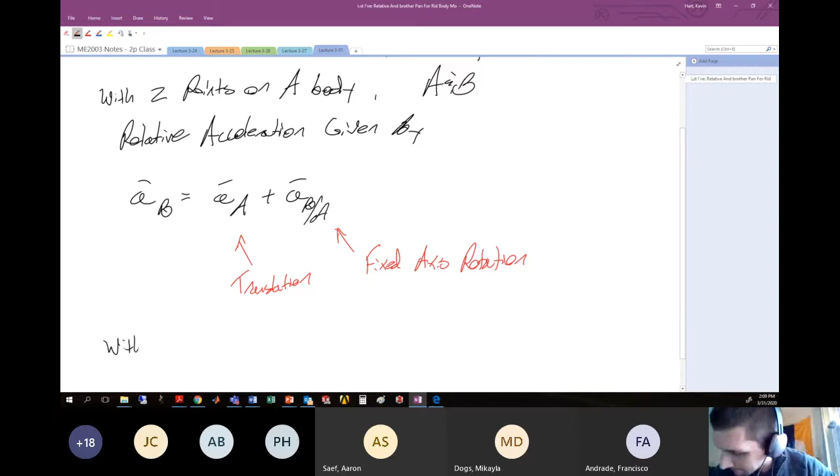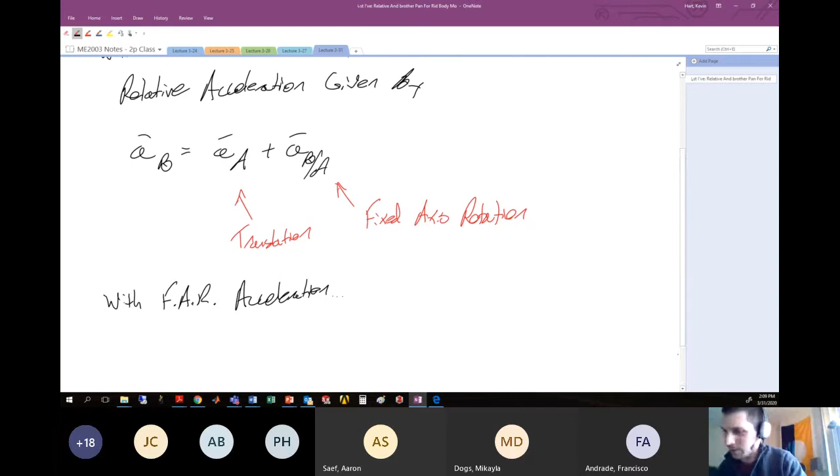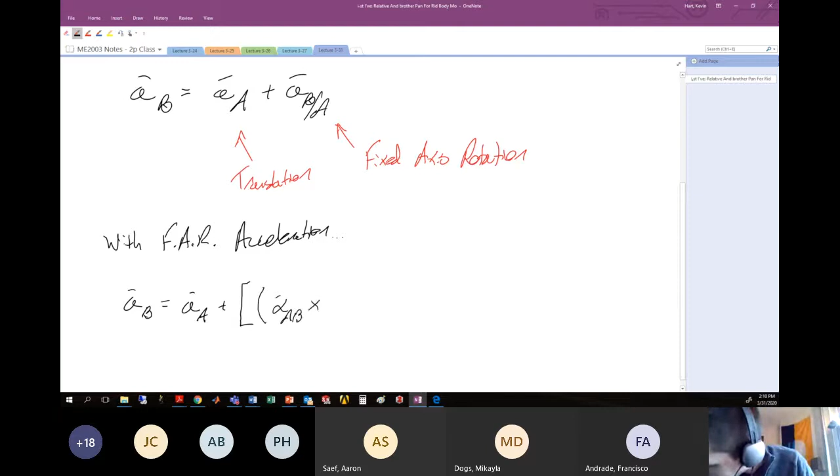And so with fixed axis rotation acceleration, we come upon the general relative acceleration equation that we use over and over in this class, and that is that the acceleration of B is the acceleration of A plus the fixed axis rotation, which generally we say is the angular acceleration of body AB crossed with the position vector locating B from A, plus the angular velocity of the body AB crossed with the angular velocity of the body AB crossed with the position vector locating B from A.

Okay, if you've worked on homework 2, this should be very familiar to you at this point, since you've had to use this equation quite a bit. So as I mentioned before, this was box-worthy and sparkle-worthy, this is one of the 2 equations that you use in this class over and over. Even after we get done with this portion of the class, when we start to move on to kinetics, which relates things like forces to acceleration, you'll still be using this equation over and over. So this guy gets sparkles, he's very fancy.

Yada, yada, yada, sparkly, sparkly. All right.

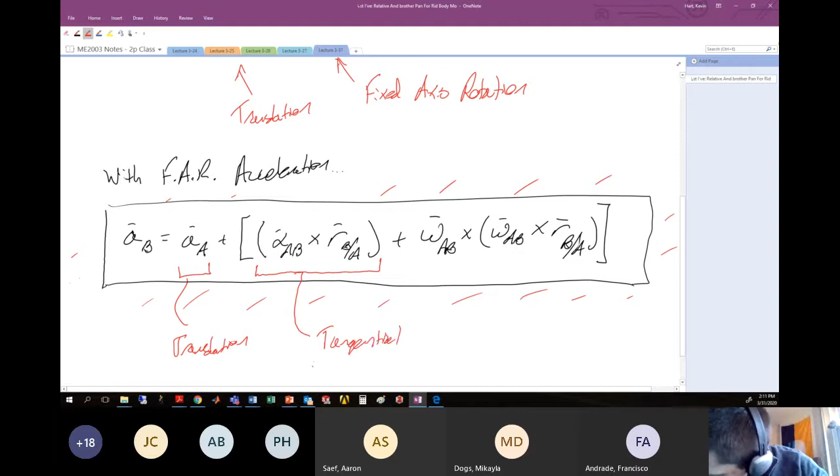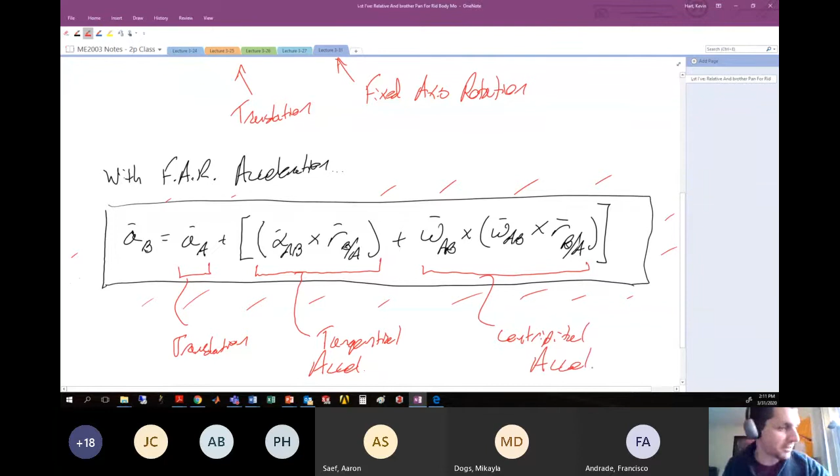Sparkles are good. Again, translation. And then this entire back end is the fixed axis rotation, but we can further split up the fixed axis rotation into what we say is a tangential acceleration component. And this we say is a centripetal acceleration or normal acceleration. So this is the acceleration component that points back inwards to the point of rotation.

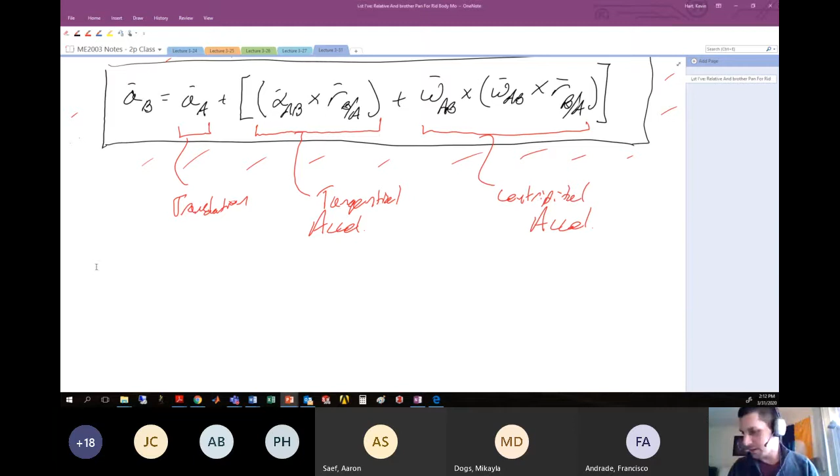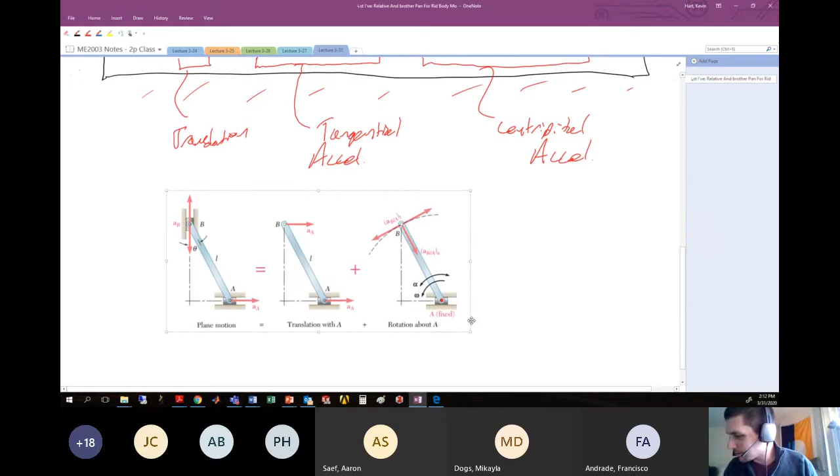All right, so we introduced this equation. I want to dive in a little more depth on this guy, and then we'll do an example problem. So I'm actually going to steal the image from your notes. If you have the PowerPoints in front of you, I'm going to steal a particular image and talk through what's going on in it. So instead of trying to draw it myself, which would probably be a disaster, I'm going to pull it up here, make it nice and large so people can see what's happening in this picture.

Okay, so this picture is a representation of physically what you might see from the mathematical equation that we derived. Here, if we think about this point A down here as being pinned to this bar on a slider, and let's say we know the acceleration of A, which I've highlighted down here. Maybe I'll use blue since there's some red already in this picture. So let's say that we know that information and we're interested in the acceleration of B.

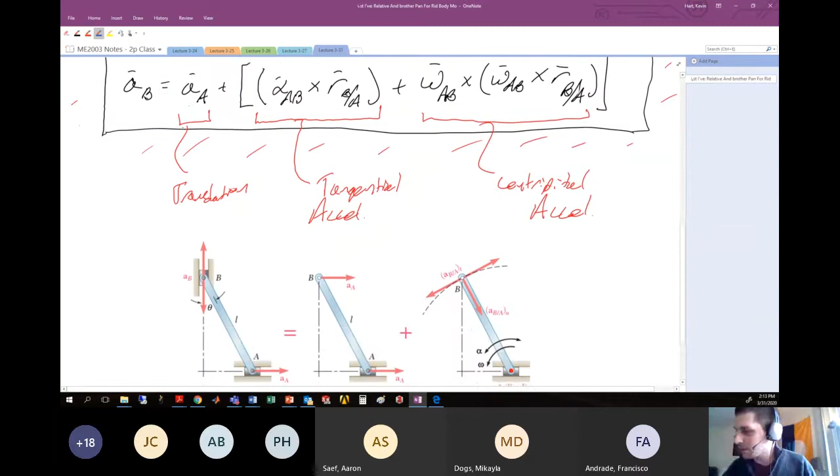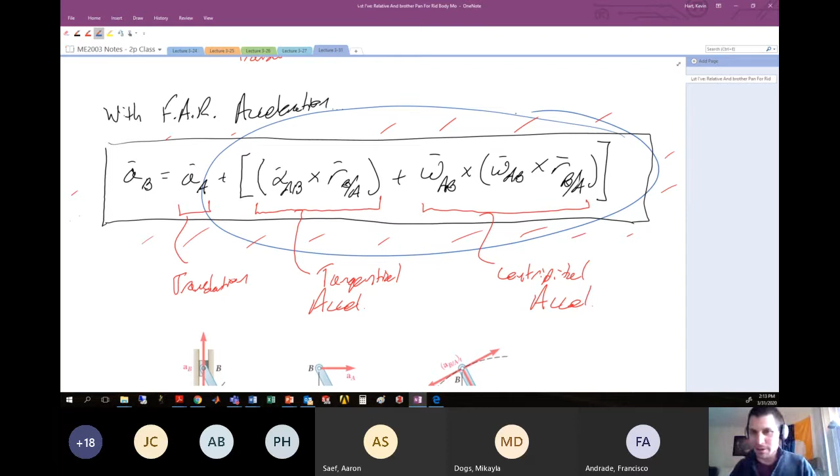Well, our equation would tell us that it is some combination of the translation of A plus the fixed axis rotation of B relative to A. The fixed axis rotation has 2 different components to it, the tangential and the centripetal portions, and I want to expand on that a little more. This image is trying to show that the total acceleration of B is the translational component. Here we see that the translational acceleration of B is the same as the translational acceleration of A, plus these additional components on this other piece.

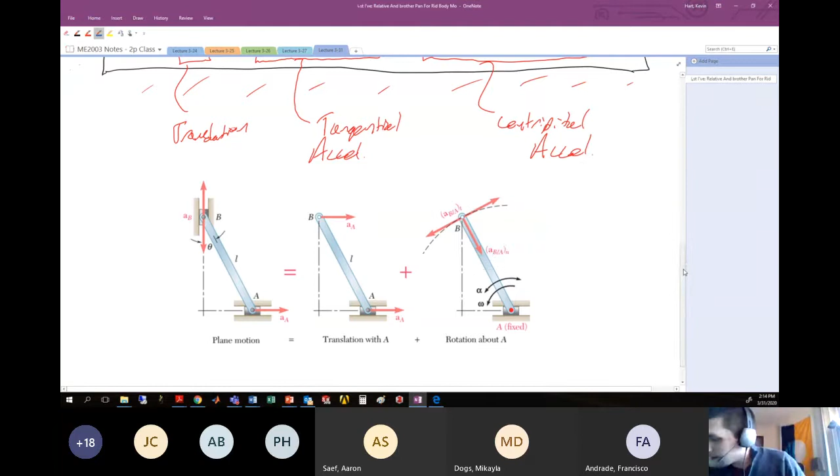Where these components are from fixed axis rotation. And we see the 2 different terms that pop in from the fixed axis rotation. So here, this is the tangential term. These 2 arrows are meant to denote it could be either one way or the other. In reality, only one of these directions would be present, but they're showing that it could be occurring in either direction. And then here is the centripetal portion, and this guy up here is the tangential portion.

All right, let's dive in a little bit more on this mathematically. Generally, this guy as a tangential portion is sometimes written, and you can see it here, but I'll make it a little bit more clear. This is the acceleration of B relative to A, and sometimes it's given this sort of T subscript, for sort of the tangential component.

And then this arrow here, you can probably see it on the image here. This is the acceleration of B relative to A, this fixed axis component. And this is a sub n for the normal component of that acceleration. Normal typically meaning pointing inward or outward away from yourself. All right.

So we can sort of show what these might be mathematically. Recall that if we look at each one of these individually, the tangential acceleration is this acceleration of B relative to A sub t. And this portion of the acceleration is the angular acceleration of the piece crossed with the position vector locating B from A. So that is this alpha AB crossed with the position vector locating B from A.

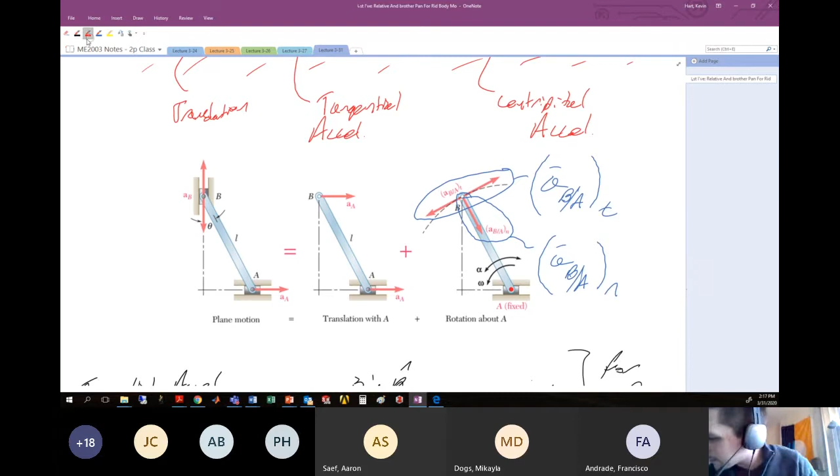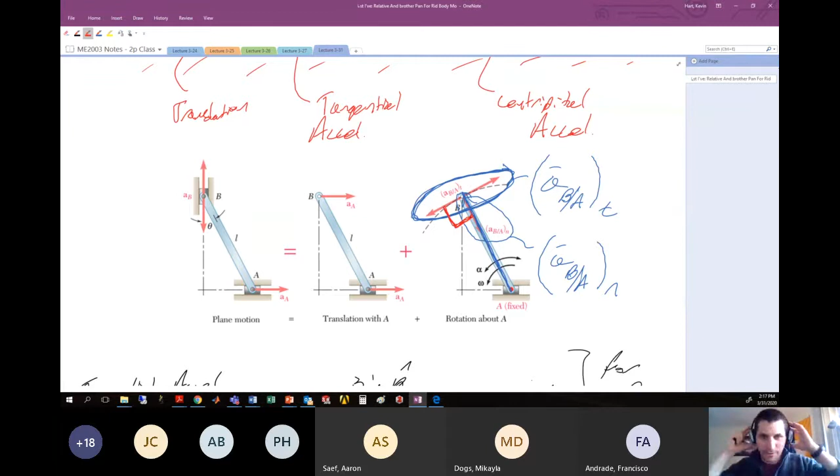And we can see that if we move back up here to this particular picture. The vector here that defines the tangential acceleration component is perpendicular to both the angular acceleration vector, which is out of the plane, and the position vector that locates B from A, which generally is this vector. So we see the tangential component being perpendicular to the vector that defines B from A, and that's generally always going to be the case when we have this planar motion. All right.

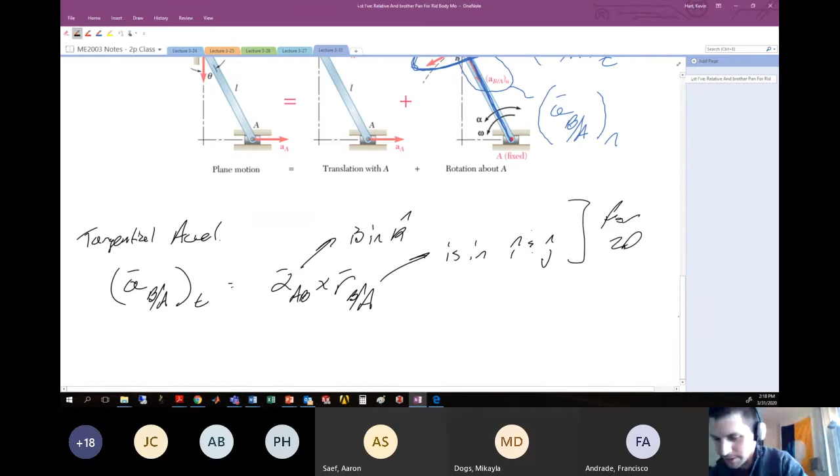So that is analogous to the velocity when we have omega cross r, where we know that the velocity will be tangent to or perpendicular to the position of the piece in the plane. So the tangential portion is there. Let's page down a little bit and talk about the centripetal component, or sometimes called the normal component. This is the acceleration of B relative to A in the normal direction, the second component of the fixed axis rotation acceleration. That is omega AB, the angular velocity, crossed with the angular velocity AB, crossed with the position vector locating B from A.

Now, this one, when we simplify to 2D, is a little more complicated. But the idea is that usually this guy is in K hat, this guy is in K hat, and this guy has some components, like Rx I hat plus Ry J hat. Interestingly, when you have omega cross R, and omega is in K and R is in I and J, this term will simplify to have a negative sign for the signs that are contained in the position vector.

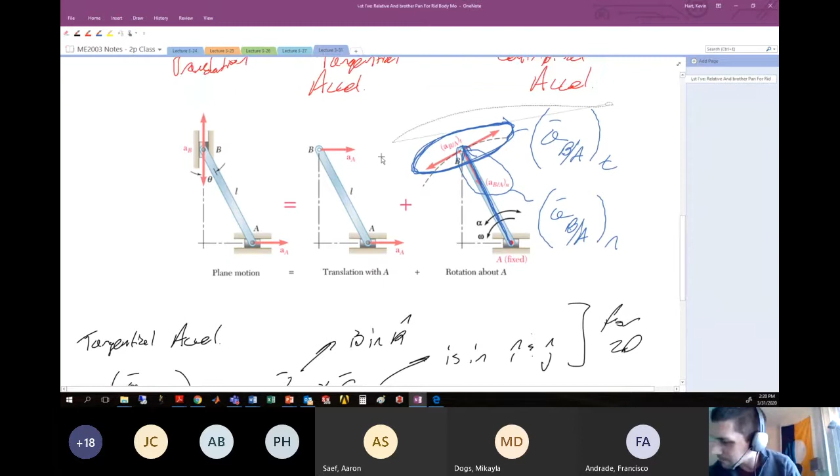So here's the position vector that locates B from A. It is here. And you will notice that the normal component of the acceleration, which is here, the acceleration of B relative to A, is pointing in the negative direction of the position vector that defines B from A. And that's because of this sort of double cross product that you have to go through,

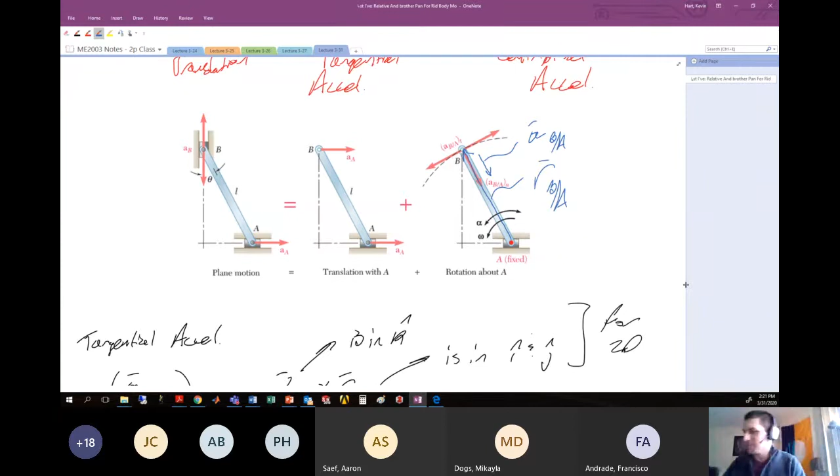which is like omega cross omega cross R. All right, so what ends up happening is, here's your R, and you do an omega cross, it's going to point you right back to where you started. So that's what generally happens in these 2D problems. All right, so we've done kind of a dive here on this.

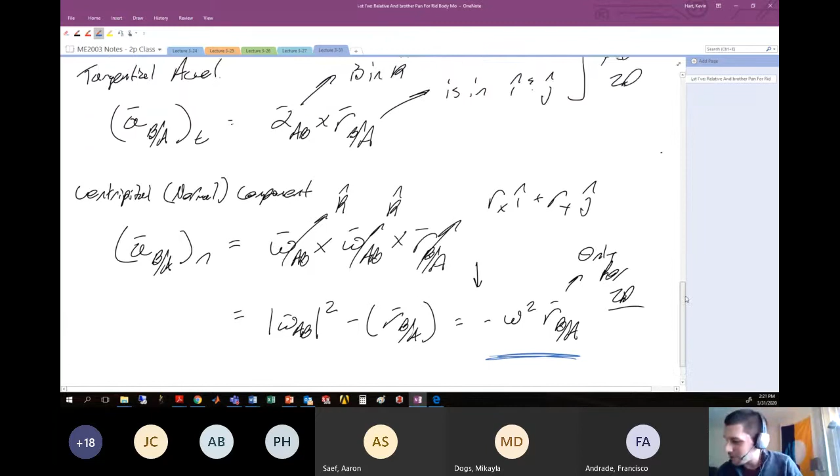So if you like the idea of using this sort of shortcut, and for the tangential acceleration, pretty simply here, if you want to cut this down by just writing something like alpha r bar, that's fine. But after this discussion, I just want to make one last note about general relative velocity and acceleration equations.

Okay, so we've had some discussion about some shortcuts that you might use for velocity. Remember, we talked about right-hand rule and the magnitude of the velocity being the magnitude of r multiplied by the magnitude of omega. Okay, we've had some discussion about shortcuts for calculating relative velocities and accelerations.

If you like some of these shortcuts, like calculating the velocity using these magnitude tricks and the right-hand rule, if that works for you, great. Fantastic. Make sure you know when that is useful and when it's not. If you like some of the shortcuts that I just breezed over here for calculating accelerations quickly, like using this shortcut to calculate the normal component of the acceleration, perfectly fine. Go ahead, I don't mind that.

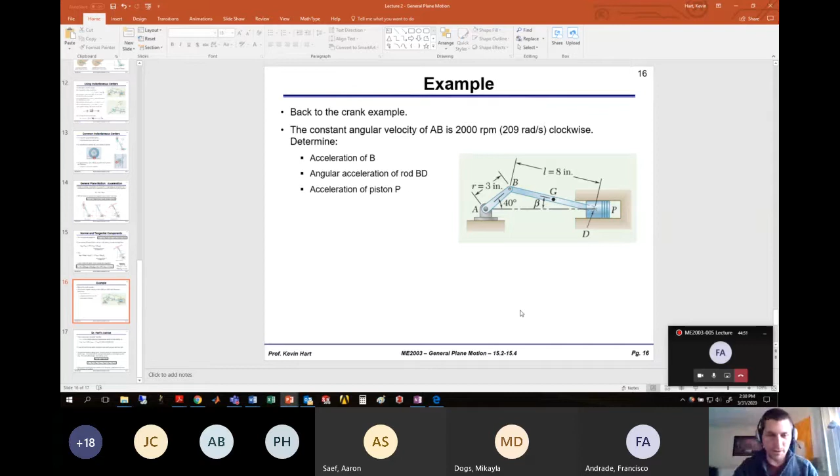Okay, I'm going to switch over to the whiteboard here. I basically recopied down information from this slide onto the whiteboard, so we should all be able to keep going if you're still kind of copying the problem. And I'm kind of reminding you here about some of the other intermediate values for this problem that we actually solved for when we went through this example last time, doing the velocity analysis.

So remember last time we did velocity analysis to determine that the angular velocity of link BD was 61.9 k hat radians per second. This is a piece of information we'll need later. And then also this angle beta that is formed between rod BD and the horizontal was 14 degrees. Okay, so those are two pieces of information we're going to need as we go through the acceleration analysis. Okay, so let's go ahead and make it rain. Let's make this thing happen.

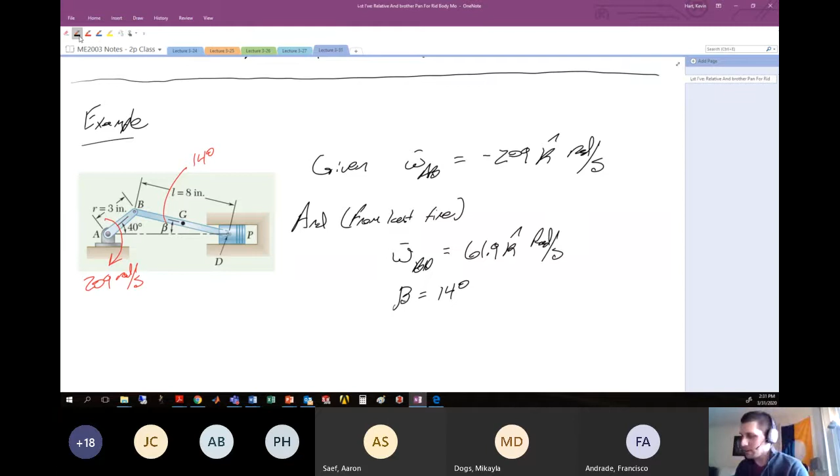All right, so we already did the velocity analysis. Okay, and that's more or less where we got this information from. That was from the velocity analysis. My general theory is that if you're going to attack problems like this, you want to start with velocity analysis of the entire system and then do acceleration analysis of the entire system.

So when you come upon homework problem number 3, for instance, which looks very similar to this particular problem, I would advise the full velocity analysis first to get things like angular velocities and velocities of points of interest, and then proceed with the acceleration analysis where you're analyzing for, let's say, acceleration of various points and angular accelerations of the various rigid bodies in the system. All right, so let's now do the acceleration analysis.

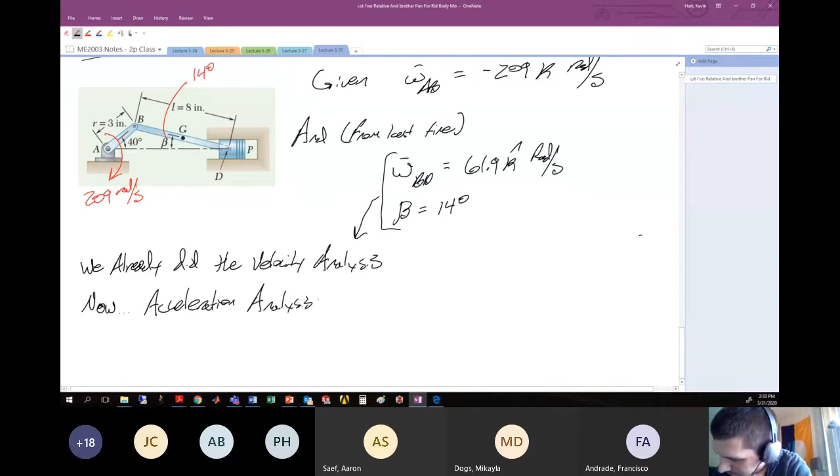Okay, so for the acceleration analysis, we're going to work it the same way that we did for the velocity analysis. We'll start where we know some information. In this particular example, it's at that crank AB, and we'll propagate that information to additional links in our linkage by understanding that the acceleration of points that are linked up together will be the same regardless of which link you're particularly looking at. Okay, so start at link AB.

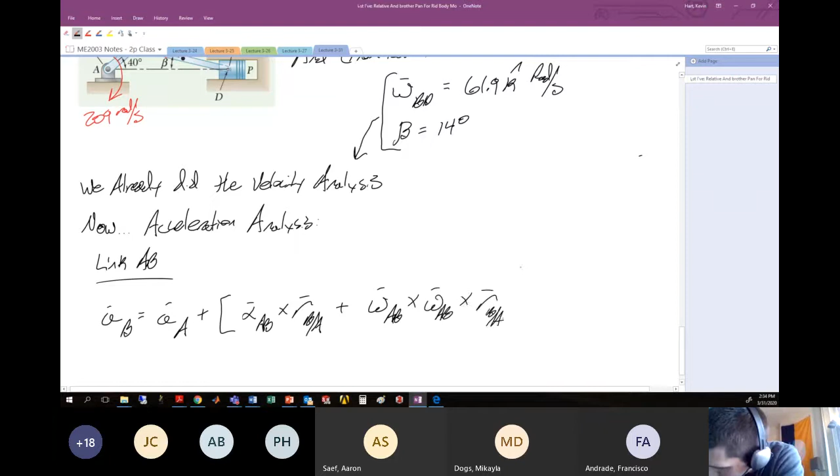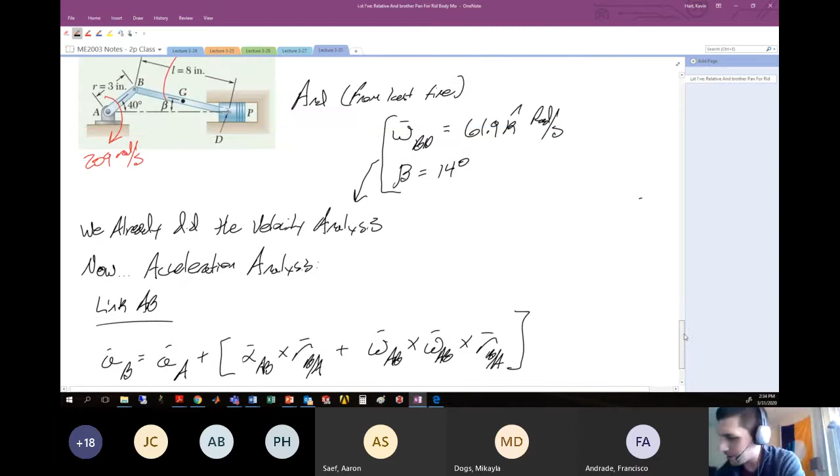And here we will write that the acceleration of B, this is our general relative acceleration equation, is going to be the acceleration of A plus the angular acceleration of AB crossed with the position vector locating B from A, plus angular velocity AB crossed with angular velocity AB crossed with the position vector locating B from A. All right. A couple of things we can identify straight away is that since point A is fixed at this particular location, the acceleration will be 0. So I'll point that out straight away because this is fixed. All right, so useful, helpful.

Next thing, let's define some of the other bits of this equation. We'll say that omega AB, we know from previous, is negative 209 k hat radians per second. We also know the position vector of B from A. You can use trigonometry to get this. We know that this length from A to B is 3 inches, and the angle with the horizontal is 40 degrees. So just with some trigonometry, I'm going to cut to the chase here and recall that this is 2.3 i hat plus 1.93 j hat.

And units here are inches. All right. So with this now, we're sort of ready to do the analysis here, except we have to understand one more thing, and that is what is the angular acceleration of this link AB? Okay, so one last thing we'll note here is since omega AB is constant at 209 radians per second, that was given in the problem, angular acceleration...

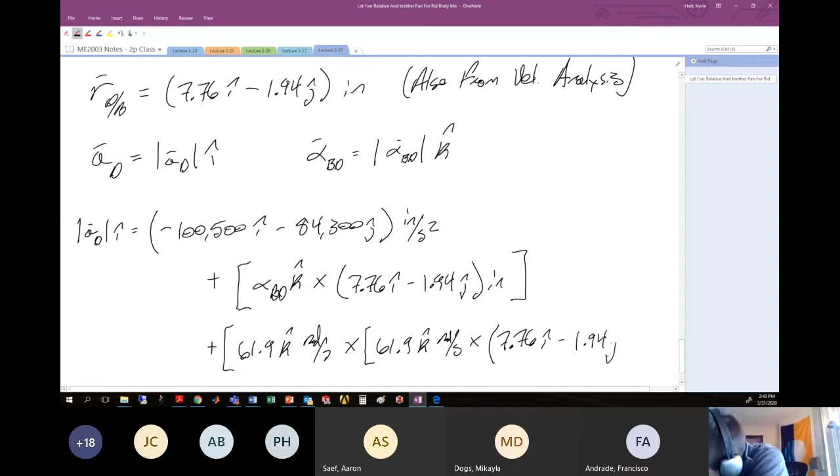plus the final centripetal term, which is omega cross omega cross r, which with numbers will be, remember our angular velocity 61.9 radians per second. So here we have 61.9 K hat radians per second crossed with 61.9 K hat radians per second crossed with our position vector locating D from B, which is 7.76 I hat minus 1.94 J hat. All right, so a lot to this.

Remember this first term is the translational acceleration of D that we know from B. This term here is the tangential acceleration, which comes from the relative fixed axis rotation of D with respect to B. And this last component is coming from the centripetal portion, the normal acceleration that results from the fixed axis rotation of D about B. So these are our three acceleration terms in this expression.

So a lot going on here, but in fact we only have two unknowns in this equation, and we have two equations. Remember, this is one equation in I, one equation in J. The unknowns are the magnitude of the acceleration of D, and the angular acceleration of rod BD.

All right. Wow. It just went all the way back to the beginning there now, didn't it?

So let's bang this out, and we'll look at the two different directions. Let's start in J. Since J is not represented on the left-hand side, we can write 0 equals negative 84,300, which comes from the translational component, and then the two terms from the tangential and centripetal portions: plus 7.76 alpha BD, plus, after doing this last portion of the cross product, 7,430. This will be inches per second squared.

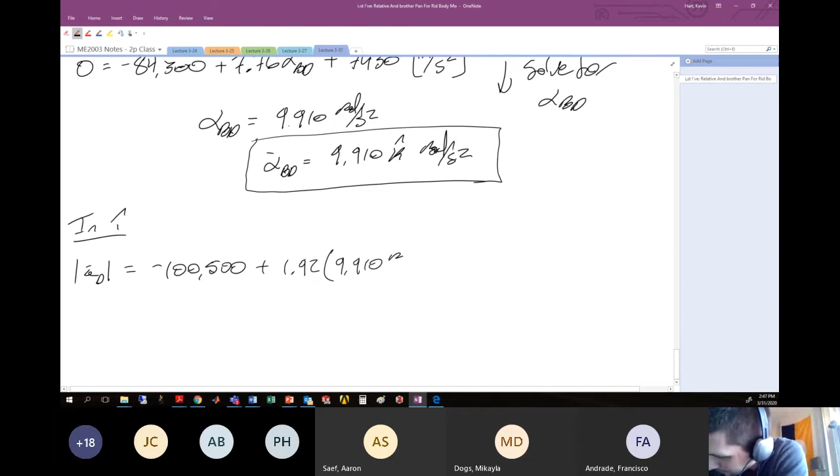We have the magnitude of a D on the left-hand side equal to negative 100,500 from the translational component, plus 1.94 times alpha BD, which we now have is 9,910 radians per second squared. So this is the tangential component of the acceleration. And the last bit, from the centripetal portion, is minus 29,700. Units are inches per second squared.

So after this rigmarole, you get that the magnitude of the acceleration of D is equal to negative 111,200 inches per second squared. Or writing the acceleration vector properly, the acceleration of D is negative 111,200 I hat inches per second squared. Some big numbers there, but that's the general idea.